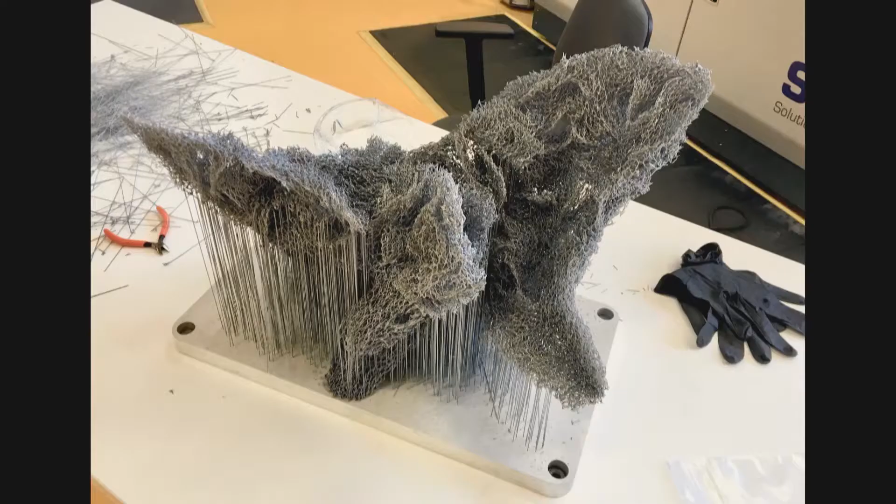This one's constructed very simply. This is laser-sintered aluminium. We've done a series of projects along these lines which are sintering aluminium or titanium. And it's a very small scale object. There's about 1.1 million elements in it. Each one's about 0.4 of a millimeter in diameter, so quite small.

And there's a whole series of different readings at different scales of this. So at the edges, it's sort of almost a frayed, feathered edge. As you move into the center of it, it becomes much more turbulent and thick and massive, I suppose.

We're quite interested at what scale. This is all made from straight lines, of course. It's quite small straight lines. We're quite interested in at what scale you read something as straight, and at what scale you read curvature in the work, and at what scale the intricacy almost dissolves into a silhouette of the project.

So this is, as I said, probably the most purely algorithmic of the processes that I'll show today. And the algorithm draws from the work of Craig Reynolds. This is work that was done in the 1980s around simulating flocks, schools of fish, social insects. And it was a very clear demonstration of the bottom-up nature of these types of behaviors that are found in nature. Now, what we're trying to do in the practice is not try and make architecture somehow swarm-like or flock-like or natural or biological in any way.

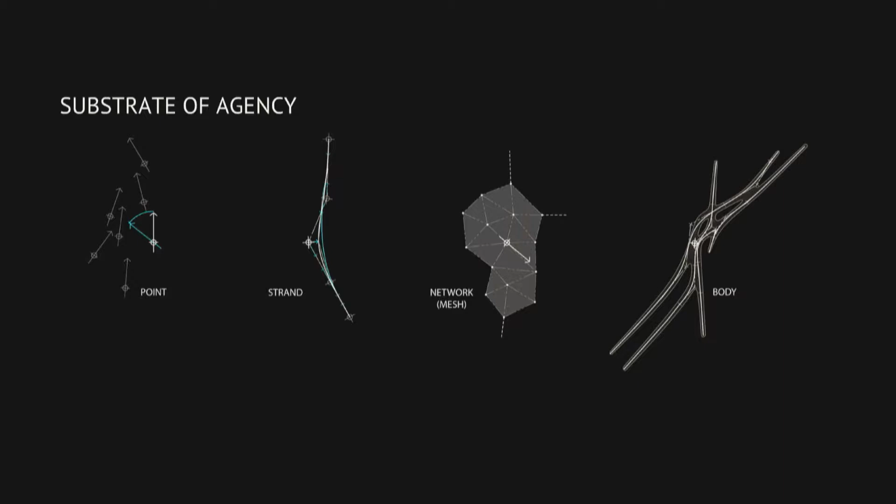A lot of the multi-agent work that we see arising in architecture and other related creative fields think of the agent as a point, and points are, of course, extremely difficult to make architecture from. So we're interested in the way agency can be embedded in higher levels of geometry. So occasionally we're using it as a point, but more often we're using it as a control point on a curve or as a vertex of a network, or the one on the right is an agent body, and I'll talk about that a lot. That's had a very large influence in the work that we do.

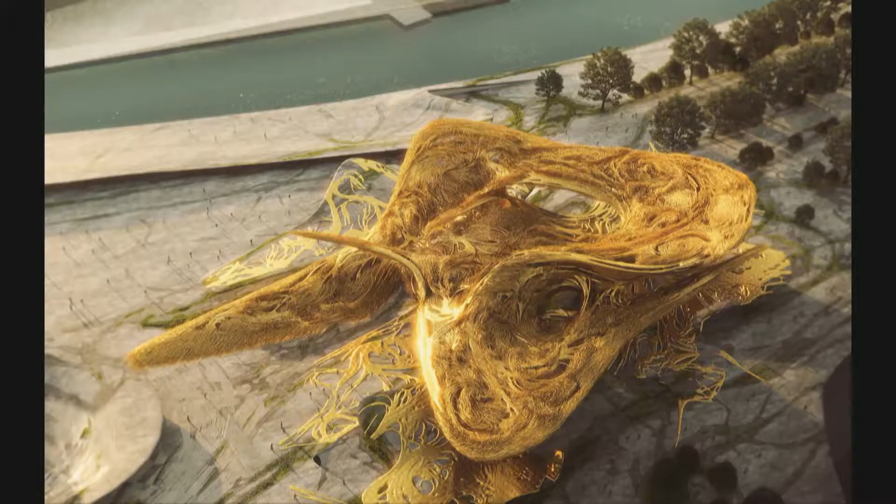So I want to quickly describe how we've used this over the years. So this first series of projects are all, I think, probably over 9 or 10 years old. The older projects in our work, and we've used this as a way of generating form and looking at the relationship between form and articulation and how these can be seen as a synthetic relationship, or the way that structure, form, and articulation might all be produced by the same algorithm and start to have a synthesis. Or the way these algorithms might be used to create these types of fibrous or hairy geometries.

Or the way this type of algorithm might enable us to uncouple the relationship between geometry and element. And I guess Gilles talked about this a little bit as well, this idea that you don't have an architectural element that relates to an architectural role. Say in this tower, for example, the shell of the tower is partly structural. It's partly, of course, formal and provides a surface. It's sun shading. It opens up at certain points. It becomes spatial. If it got a little bit finer, maybe you'd be able to describe it as being ornamental, but perhaps it's expressive in some way. So it's one piece of geometry that does several things.

So in this case, the architectural role of, say, resisting load is a behavior. And these behaviors operate and negotiate through this one piece of geometry. And then in the end, that piece of geometry ends up negotiating but also expressing the outcome of those different architectural roles and behaviors. So we've looked at this at several different scales.

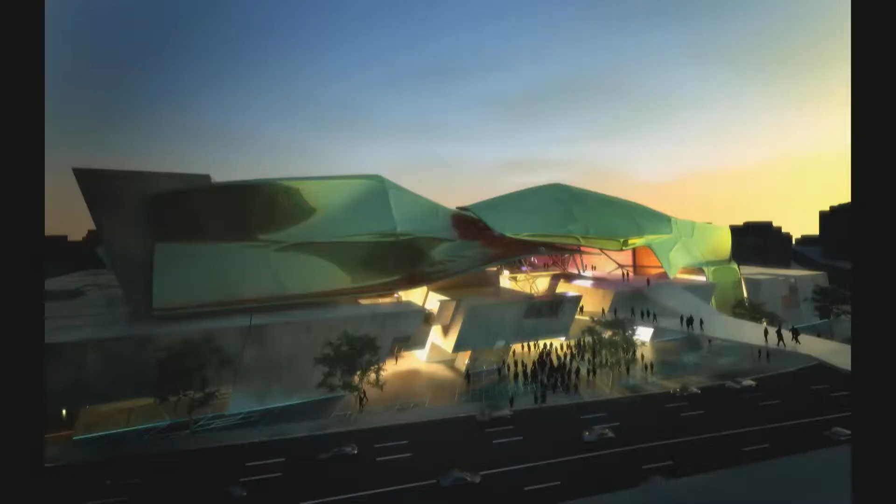Another key concern in the work has been around the relationship between the bottom-up and the top-down. When Rob and I started Kokkugia in 2004, we had this very naive belief that perhaps all of architecture could be generated from the bottom up through emergent systems. And of course, as soon as we started to attempt to do that on more complex architectural programs or projects, we realized that there's a whole lot of questions in architecture which are simply not complex ones. They're not ones that need self-organization, and they're actually much more suited to direct operations.

So we started looking at what is the relationship between the top-down and bottom-up, and in this type of example, it was modeled originally as a single surface, directly modeled in a top-down way. Then it began to self-organize and reorder in a bottom-up fashion. It's something that we worked on with Tom Wiscombe, an architect from Los Angeles.

We collaborated on this project, and this became a much messier relationship, almost symbolic of the way at the time our practice, Kokkugia, and Tom were working in quite different ways. He was working in quite a direct way, and we were working in quite a bottom-up way, and this became this messy hybrid of the two, almost originally a Frankenstein, where these two different processes would interact, and over time, something would be generated and then be remodeled and then go back and be regenerated. And through this constant process, it came into some sort of synthetic relationship where it was hard to trace the project back to either explicit moves or generative moves.

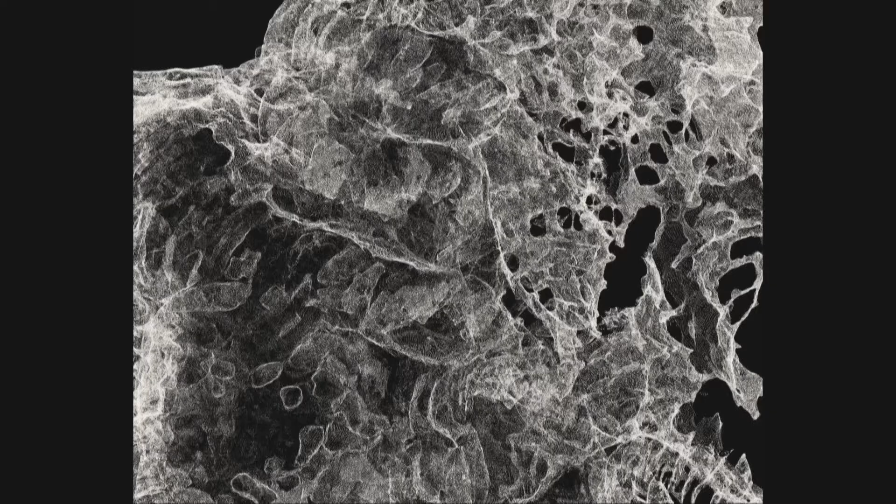So something is gestural, it goes back and is then reformed algorithmically, begins to self-organize, it's brought back out, it's repainted and rebrushed, and we developed a series of these types of geometries. And the aim with these geometries is to try and make something which couldn't be understood as being indexed back to its process of formation.

This is something that we've also worked on with students. This is probably the only slide I'll show today of student work. It comes from a studio that I teach at RMIT, and this is the work of one student from several weeks. We'd normally ask these students to produce 15 or 20 of these objects every week. What we're trying to do is ask students to really develop an aesthetic sensibility in terms of the way self-organization and painterly operations might work.

So another relationship, another way of undermining or subverting the algorithm is to take digital agency and material agency and put them into a feedback loop where they each inform the other. And so this is a project that was done in collaboration with Gwil and Cam, who I think are somewhere in the audience, from Fologram.

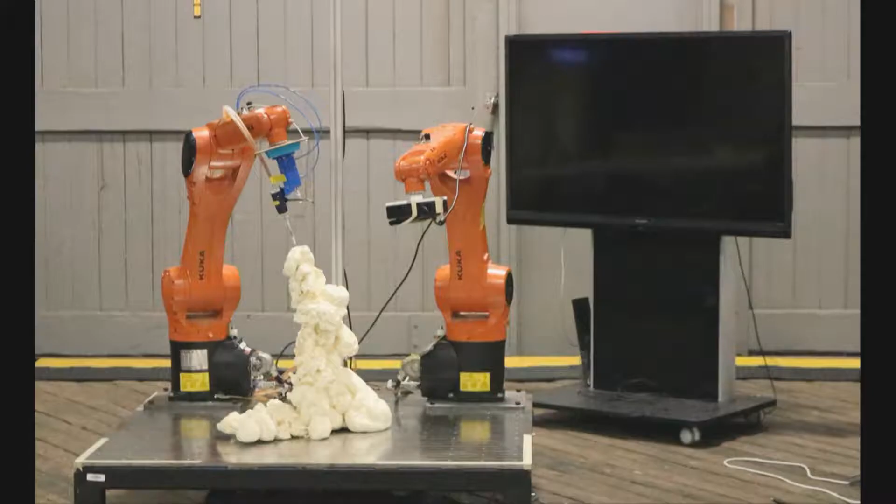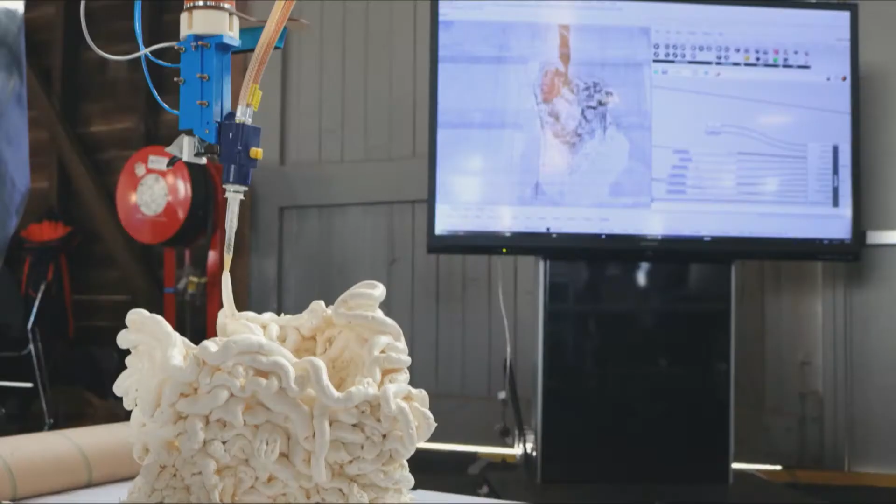So it's a totally absurd project. It's a project where we have one robot that's squirting out foam, another robot which is scanning it. In fact, there's a couple of scanners that are used. And so what the robot sees is something like this. It's fairly low resolution. And typically when we're working through this, there wasn't a pre-designed model, but what would happen is the robot would extrude some sort of fairly disgusting foam, and then it would scan that, and it would make a decision as to how it's going to extrude something next.

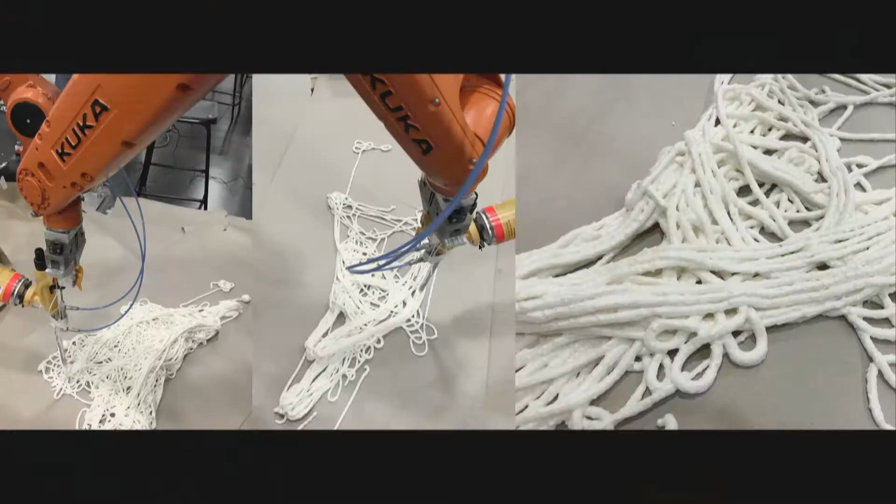But you can see even in the very early studies, there's some sort of order emerging from that. You can see that it's not an entirely random thing. But what was interesting about it was that it created things that we didn't understand as either digital nor simply this sort of spewing of foam, but it had a series of hybrid qualities and characteristics. I mean, these are not things that we would design, I suppose. But also, it had quite a range of characteristics. In these sort of 3 or 4 slides, you can see, I would say, a diversity of character. Okay.

The rest of the projects I'm going to discuss are based on an algorithm that we developed about, I guess, 10 years ago now. And this algorithm is an agent body algorithm. And basically what that means is the agent has a designed set of limbs or designed geometry. And each joint in that geometry, in this case there are small splines, each joint of that geometry has a level of agency in itself. So they can start to respond at a more micro scale. When we first developed it, it was for this. This was an attempt to make an ornamental ceiling for a design competition we were working on.

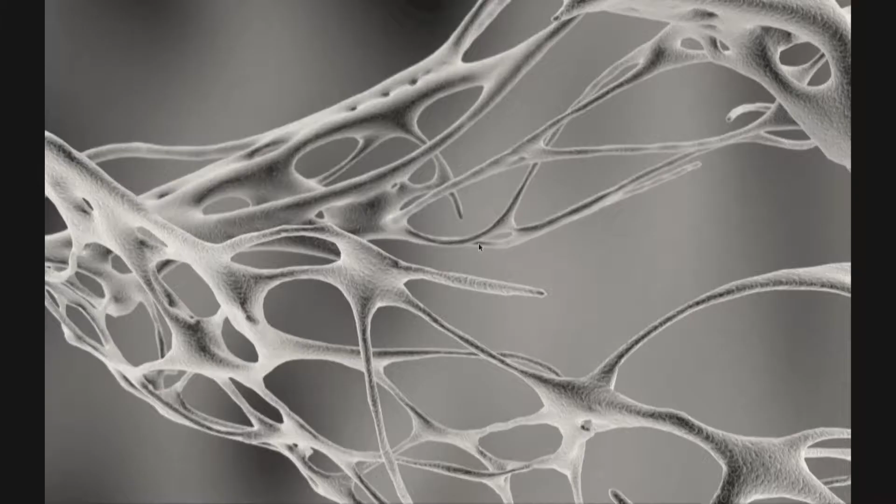And I guess in the project, there is a figure that starts to emerge from this field. But as you start to zoom in, then you see a whole lot of other conditions. So you can see some singular conditions on the left, sort of wing-like condition. Then there's sort of periodic repeating in it. There are parts which are near symmetries. And none of these conditions are written as rules or behaviors within the system. These are all emergent outcomes of the interaction of these agent bodies. And then as we begin to zoom in further, a whole series of other characteristics and qualities are evident in the work.

So when we did this in 2009, this struck us as being something which was strange, this particular image. And we tried to come to terms with what that really meant. And I suppose we saw strangeness as something which was not something we could immediately understand as being ugly or beautiful, but there was a hesitation in the way we'd evaluate it. And this became almost something we'd strive for. We'd strive to create things where we had to hesitate before being able to evaluate. Now, strangeness, of course, becomes domesticated, and this is something that now I feel is sort of very known, but didn't feel that way at the time.

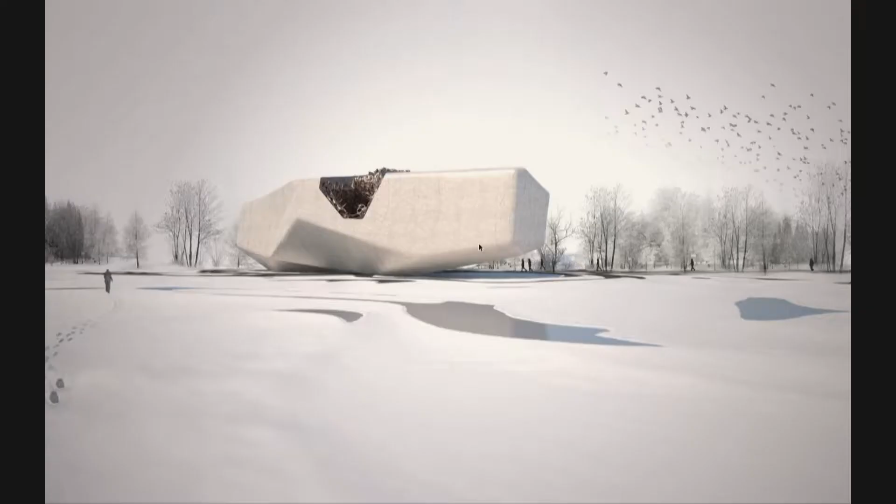The first time we tried to use this algorithm in an architectural project was a competition for a memorial and museum in Kiev at Babi Yar. And so this consists of a landscape, a sort of stone-like museum, and a carved-out memorial space. And the landscape was seen as a charged field. I mean, it's an incredibly charged project in many ways.

And we looked at the way agents might begin to navigate that field and create various different intensities and densities to generate a landscape. But then also, perhaps that becomes dense enough to then carve out a memorial space. So the project is quite unlike a lot of the projects I'll show today, and I have shown, which are all about synthesis. This project is deliberately about contrast or juxtapositions between certain things.

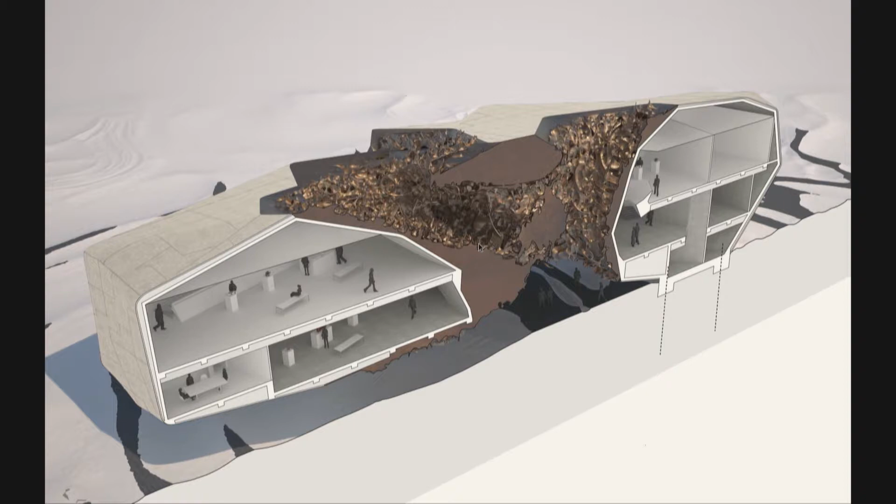It's a rock-like building that's sort of cantilevering as though it might be trying to fly, or it has a smooth outside skin and then a highly detailed, expressive, perhaps ornamental interior. That's the algorithmic diagram for the project. And this is really evident in the section. You see this contrast between the intensity of the memorial space and then the calmness or reflective nature of the exhibition spaces in the project.

Okay, so all of those agent body projects were really using the agent applied to something else. So it was either applied to the ceiling, or it was applied to the inside of a space that was carved out. But what we were really trying to do is work out a way in which we could have an algorithm that would both generate space and form, but also generate its articulation, its structure, perhaps its ornament. And so this is when we started working on this algorithm that I describe as a manifold swarm, where it goes from a cloud of points to a sort of almost manifold surface.

And this became a really critical image. This was produced in, I think, 2011, and became a really critical image in the trajectory of the work. I guess when we made this, it seemed to embody a lot of those things. It embodied something where the same algorithm created space, form, structure, its articulation, but it was impossible to build.

And so in many ways, the rest of this presentation is really trying to describe how we went about trying to build. It's what's become a personal obsession over the last 8 years now, to try and build a geometry like this. Not so much just to reify the digital, but really as a way of trying to understand how each time you solve one problem through new modes of fabrication, that has the potential to go back and fundamentally change the way you're designing something. And so perhaps that's what this presentation is. It's the story of that.

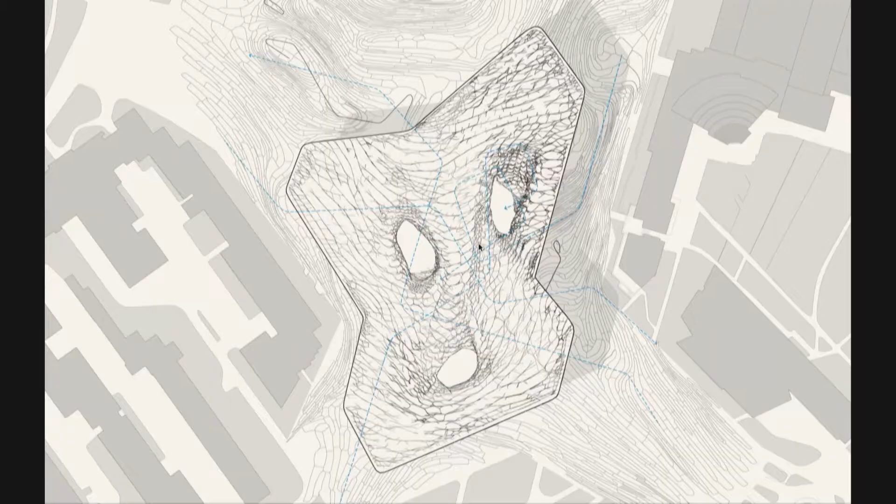So when we were first doing these types of work, this is for the Aalto University. It's a competition in Helsinki in 2012, perhaps. We were looking at the translucency of these, and we thought perhaps the first way of making these is through fiber composites. And so we went through a whole series of experiments. A lot of these were done through workshops at universities, looking at the way we could think about the strand as being one of these agent-based strands, but literally building it from fibers.

And some of those were made in 2D and then wrapped into 3D. Some of them were made on molds. And I guess going back to Mario's question or comments about molds, I think a lot of the story is about that: how we avoid them and then when they're actually necessary. We're interested in the way that these might be expressive. In the last 10 or 15 years, there's been a renewed interest in architecture in fiber composites. And of course, the first fiber composite building that I know of was the 1957 Monsanto House of the Future. So it's actually really old technology.

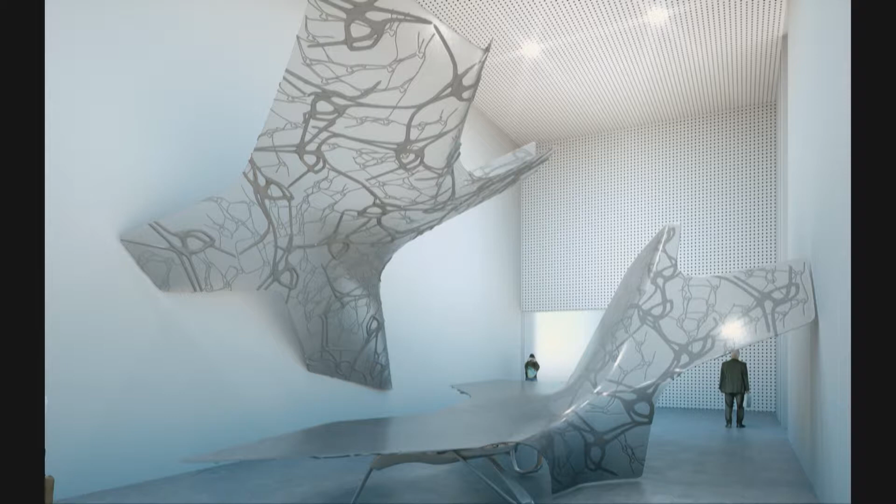So these are the digital models of that before we started to rationalize it. And then as we started to rationalize—these are some of the prototypes we made. This is the vacuum infusion process.

We realized we couldn't make a mold that's 70 square meters because of the cost. Yet we're trying to make an architecture that has no obvious repetition in it. So in order to do this, we made it out of 8 pieces.

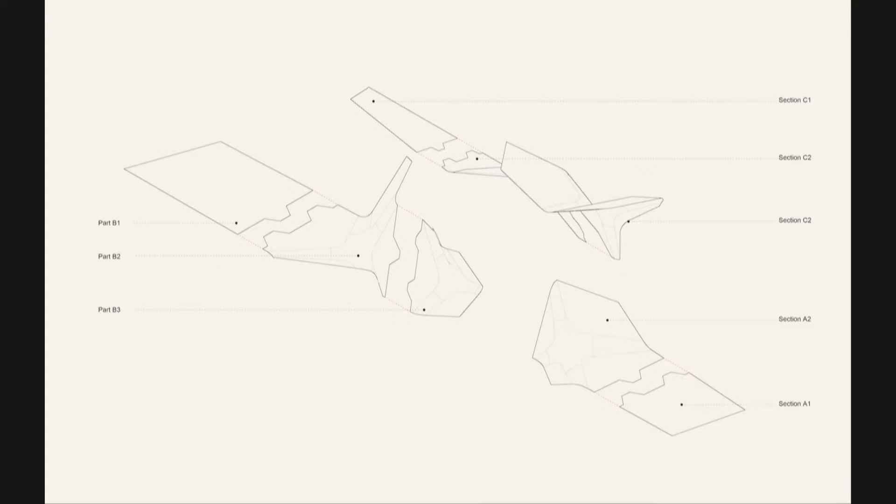3 of them are flat, very easy to make. 5 of them are curved, and each of these curved pieces comes off the one mold.

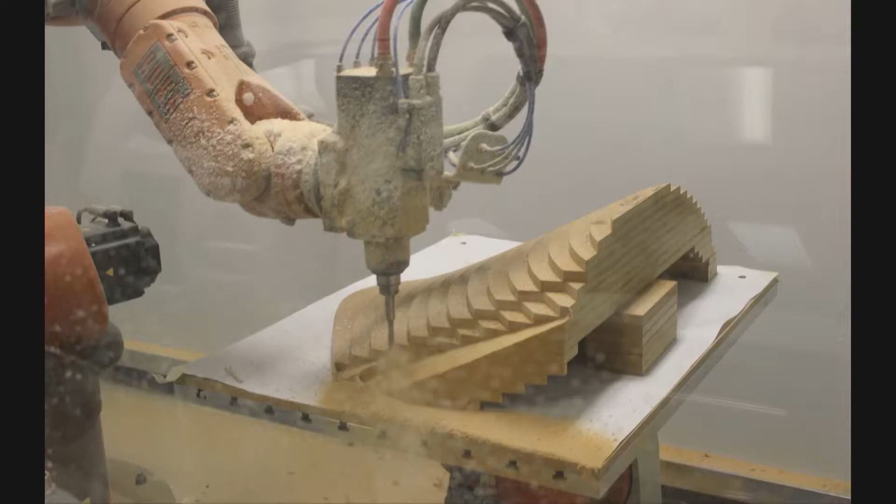Mold making is complex and difficult—there's a lot of milling involved. This piece is about 1.5 meters across. It's a very small part of a mold, partly made manually, partly made robotically. It's almost a small architectural project in itself.

It's about 5 by 6 meters, almost 3 meters tall, and there are 2 levels of structure embedded into this. One is a large scale made from rigid foam. Another is a small scale extruded from silicone.

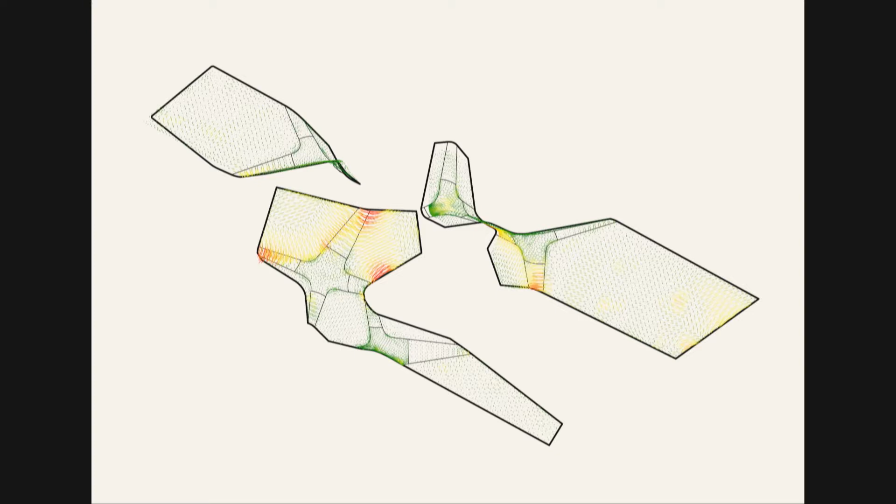And these agent bodies are responding to structural imperatives. I guess one thing I want to point out is that none of the work I'm doing is driven by structure—I see structure simply as an issue of building science, not important enough to drive architecture, which I think is fundamentally part of the humanities.

But it's something that always conditions what we do. This is a diagram of the bending moments within those surfaces and the way the agent bodies start to realign in response to the direction of those bending moments.

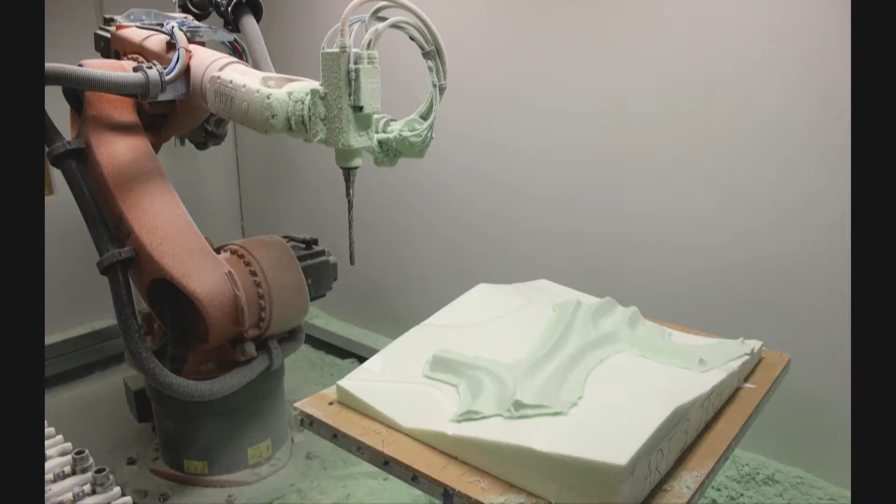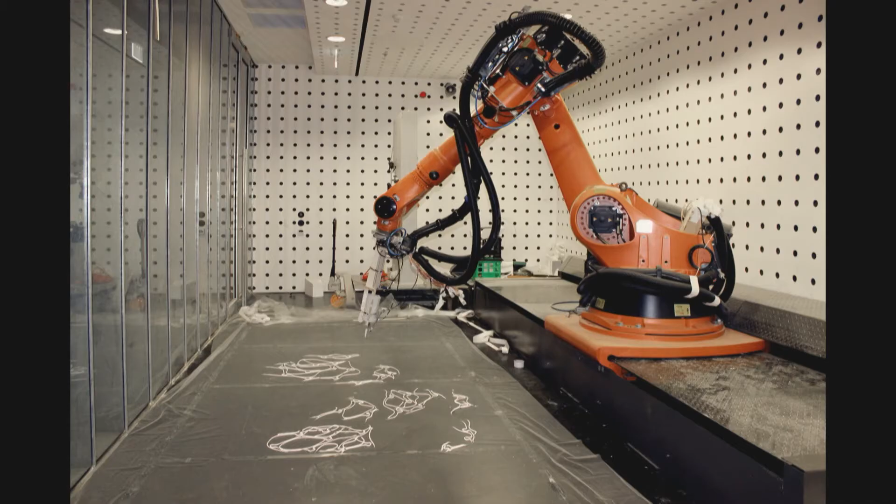The rigid foam was difficult to mill. It had to be milled on the backside, then the jig had to be milled, then the topside had to be milled. Very laborious for the poor robots. This was much easier — just extruding silicone out of a crude caulking gun that we fabricated and stuck on the end of the robot.

This is Cam in some poor working conditions, trying to work out how to lay out these one-to-one prints and drop the foam in, and even worse conditions for the boat builders. These guys used to make carbon fiber hulls for America's Cup yachts, and they said this was the hardest thing they had made, which shows how wrong we were to attempt making something this way.

Anyway, it's coated in fiberglass, trimmed down, loaded onto the back of a truck, and installed in this case at the Design Hub in Melbourne. They have a smooth side because the mold is reused, and an articulated side which comes off the top face. This was then reshown in Shanghai at the Biennale.

I guess I was trying to labor the point there that it was difficult and not really a sustainable way of developing this type of work. So we took a step backwards and said, okay, how could we create these types of forms and geometries through a simpler method?

This was an attempt to make it through flat sheet material, where you could take small pieces of metal, laser cut them, and when riveted together, they would find their own double curvature. It's a way of unrolling a three-dimensional thing back into 2D and backwards again.

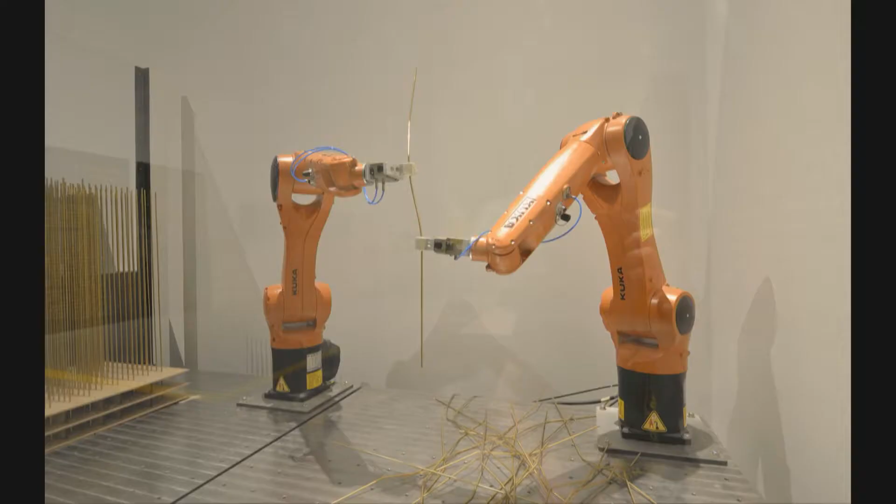So we started working on these types of projects, with the idea that we could build the fibrous lattice nature of these geometries through metal rods. This is a project where we have two little robots grabbing metal rods and bending them. Of course, there are CNC rod bending machines we could have used, but we don't own one of those — we do own little robots.

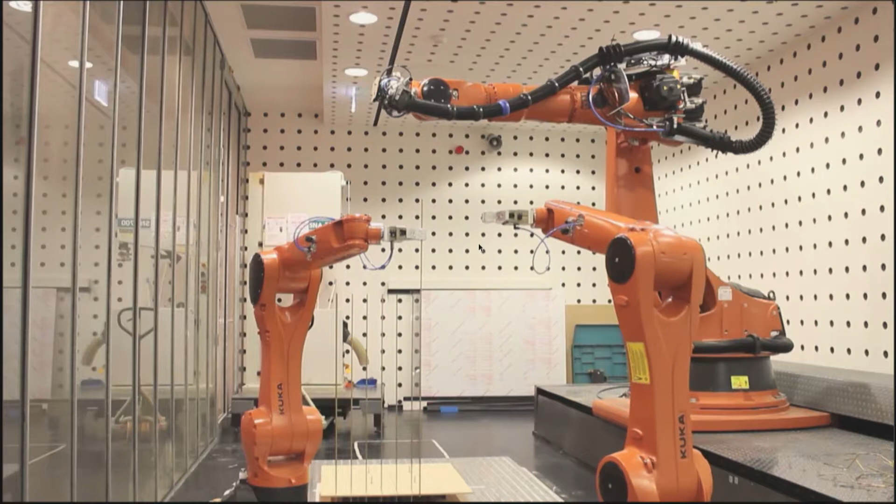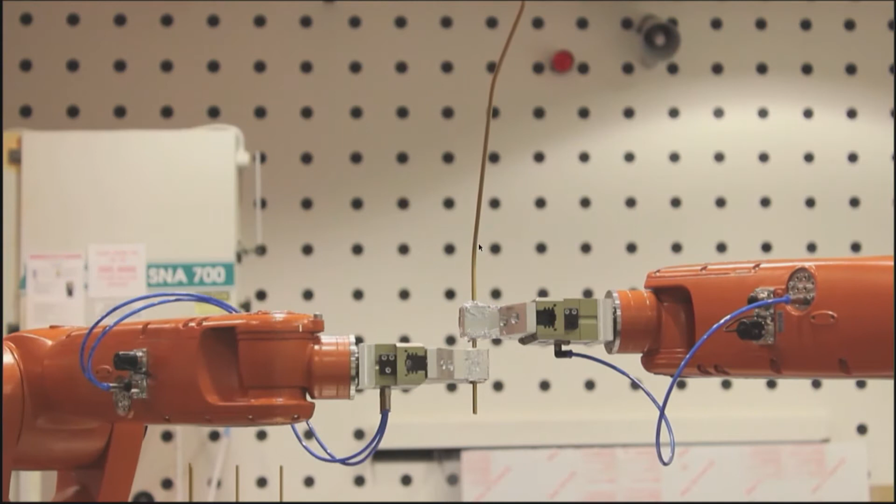So this is the type of intricate spatial implications of that. What we were trying to do is understand what the robots can and can't do — what they can bend, how far they can bend, how many bends in a certain direction they can do, what's the distance between bends. These are all parameters of robot behavior, and we needed to understand them to encode them back into the generative algorithm.

And the purpose of this is that the geometries we're creating are volatile, fairly wild, and very hard to go back and fix up or rationalize.

All the construction information, all the ways that these things are built, you must know before you start designing them, and then build them into the generative algorithm so that whatever is generated is inherently going to be built. Now, we optimized the wrong thing in this project: those robots spent one day and they bent 270 rods, every one unique. But then we had five people spending five days working out how to put them together and weld them. So we realized the problem here was not so much fabrication, but assembly.

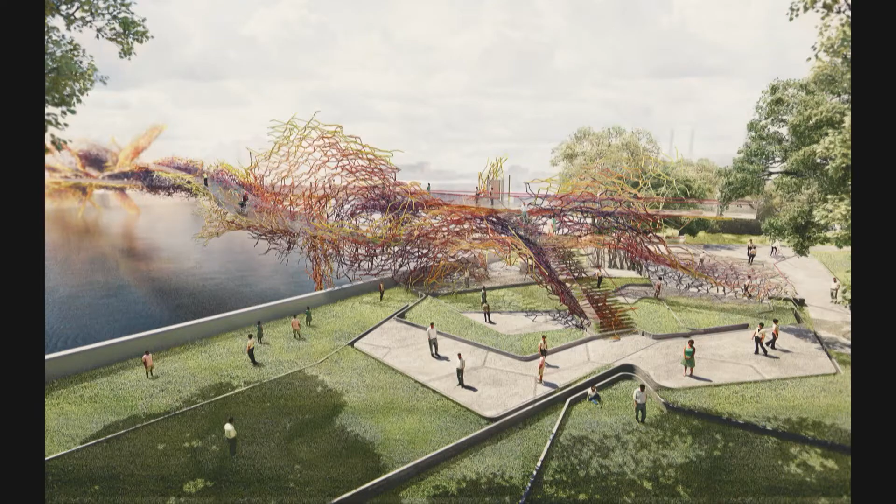We also went on to scale this up. We got bigger robots and bigger bits of metal and made a pavilion in Shanghai. But really our ambition is not to make these small objects - they're all sort of proto-architectural, things that want to become buildings, or in this case, we'd like this to become a bridge. By trying to prove at the small scale that this is an efficient, realistic, and feasible way of making something, perhaps it's not entirely ridiculous to make something that looks as whimsical as this does.

So I've described the projects going in a series of different directions, each developing their own limitation or problem. This became an important project a couple of years ago in trying to bring those problems back together. You can see in the work that we have an obsession with certain formal types, like things that are rock or boulder-like. We also had an obsession with these wings and this fibrous mass, these networks.

This was a project that tried to bring them together, but it had to radically change the way we thought about fabrication. This is an algorithm trying to unfurl like the other algorithms, but it's also constrained by these boulder-like forms. On the outside, they have a very hard silhouette. On the inside, they're starting to delaminate into a series of almost flaking geometries. So it shifts between surface and lattice, which is evident in the section.

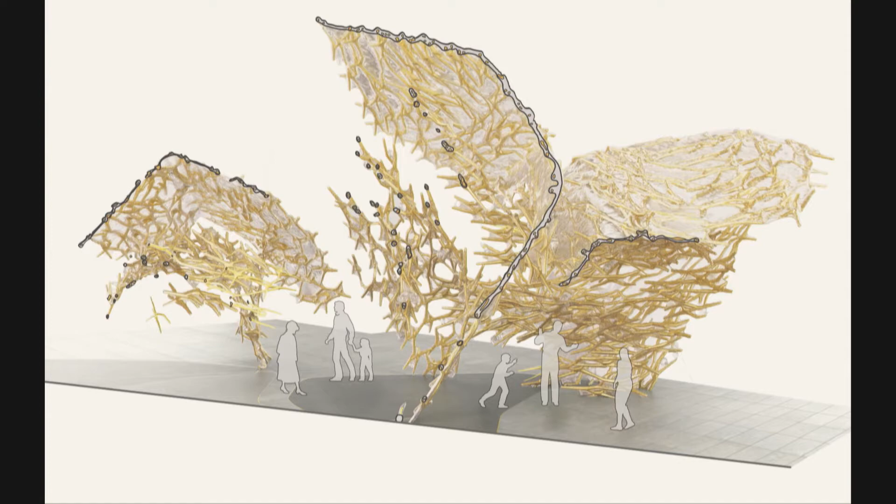In order to do this, we realized we needed a different methodology. In all the previous projects, we were thinking about how you build the network of agent bodies. We realized that in all our attempts to build them, we either needed molds for them, or we could make them as networks but couldn't surface them. Then this shift in thinking was that perhaps we should be fabricating the surface and then casting back the agent body structure into it.

That's when we started looking at large-scale 3D printing. This is a print where we're printing a thin skin, and then casting into it. You can vaguely see in these images a series of conduits, largely vertical conduits, which we were using to cast concrete into. This is a fiber-reinforced high-strength concrete - this is obviously a render - and then some of the prototypes we developed for that.

In many ways, this was able to bring together these concerns around different formal types, different structural types, and in a way that was highly efficient and dealt with the problem of the mold. So what happens is the skin is the mold. You don't produce a mold that you throw away, but instead have a sacrificial mold that you simply cast into. Then that project had a sort of younger sibling, this small project, for a public art project.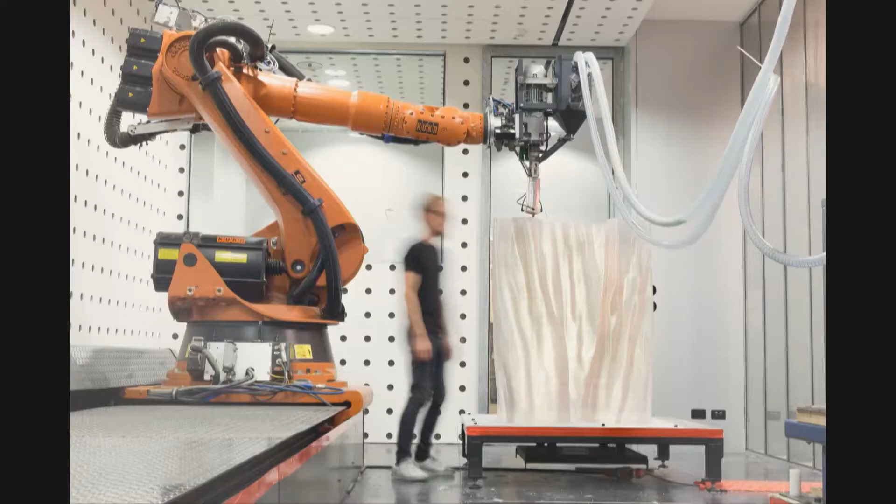So we decided to try and design through that method. This is an algorithm where basically we have a continuous sheet where it's a mesh, and each vertex on that mesh is an agent, and they start to interact. Through all these interactions, the surface begins to crease and fold and crumple in various different ways. And this again is some of the prototypes from that project.

And this is a screen grab from the algorithm, and you can begin to see how these agents are creasing or crumpling the surface. And it's most evident perhaps in the section, where you begin to see it's creasing and folding the most where there's most structural load, so on this arch at the center of that section, and then it's starting to corrugate towards the tips. So it's corrugating in the direction of the cantilever in order to resist the load.

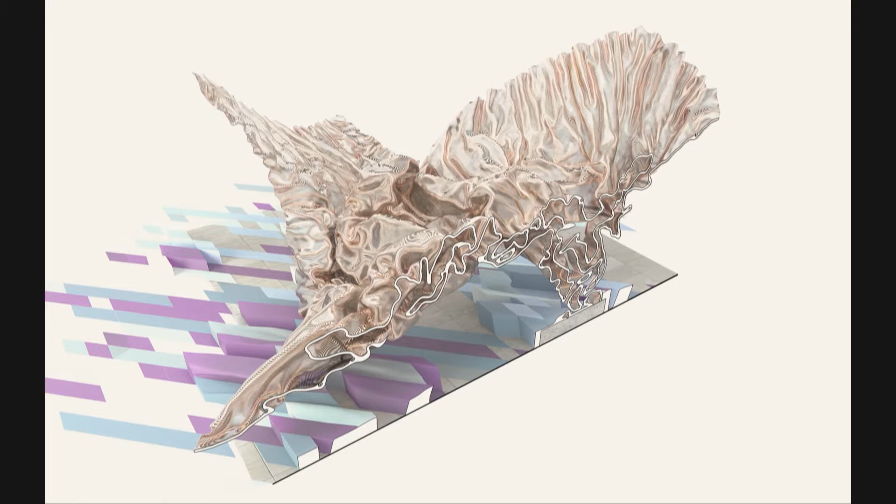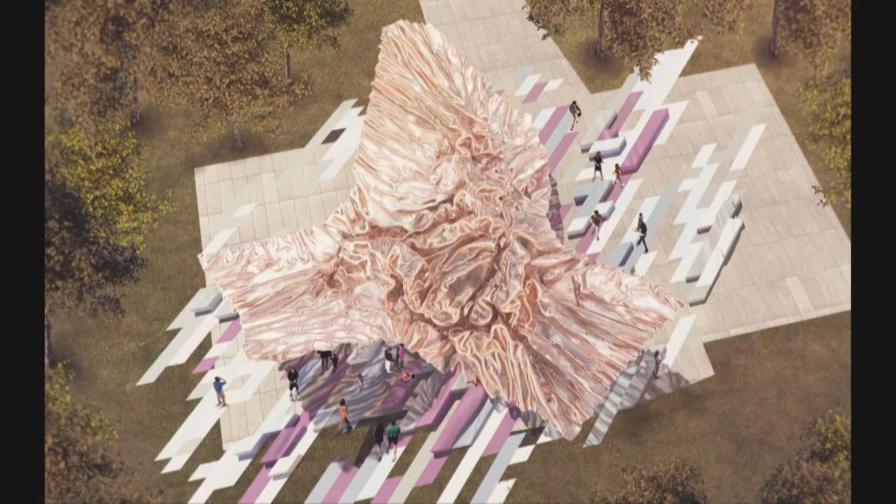So it's a sort of logic where we're combining, again, form and structure, but it's not really about structural optimization. It's simply about structure conditioning what we're doing. And so this ends up having sort of these three corrugated wingtips. This then led to the first of the built projects that we 3D printed. It's a very small project.

This is part of a facility called SensiLab. It's at Monash University in Melbourne. And so it's a research laboratory where my office designed the interior for, and I'll talk about that briefly. And then we took one very small part of this and 3D printed it.

And I guess the challenge, or what was interesting for us in this project, was just simply trying to get 3D printing through fire codes and building codes. And there's a lot of skepticism when we began about, can you get transparent polymers through all these codes? And I guess the answer is that yes, eventually we were able to do that.

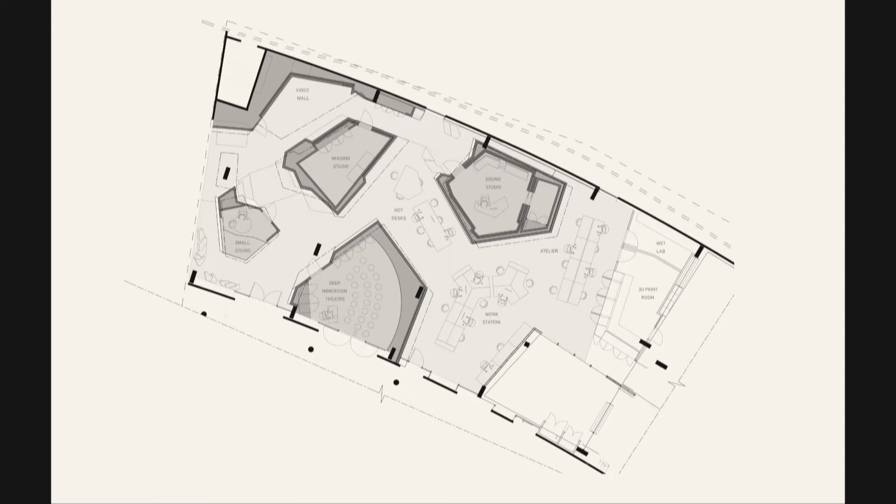So it's part of this building. It's an existing building built in the 90s by quite a good architect in Melbourne called DCM. It has this curved black wall with these sheared openings. And so we basically developed a series of these objects that would sit in this almost warehouse-like floor plate. We sort of gutted the original building, and then each of these objects sort of lean into the angle of the walls.

And so there's a series of different workstations and hot desking and different office spaces that goes between these objects. And then each of the objects have a very specific technical role. So one is a sound recording studio, there's a cinema. And the patterning comes from a similar strategy to the way we make the objects.

So the objects are their forms, and those forms get booleaned to make a series of openings and a series of, I guess, parts that are carved out from them. But then there are a series of virtual objects which boolean through and then create this patterning. So as you move through the space, these objects become in and out of focus. So some of them are smaller objects.

Some of the spaces become more carved, like this space, where they start to carve out, in this case, an exhibition space with a series of steps or display areas. And then this is just a giant capital, much bigger than the column, which has no purpose. But a detail of that is part of the reading is I'm trying to make these things look entirely solid, and so there's no joints at the corners, and this led to a very complex set of jointing details, which I won't go into.

So inside each of these objects, as I said, there's a different technical requirement in each one. This one's a sound recording studio. And this is a moment, I guess, where I've got to admit to a certain hypocrisy in the work, and I start off by saying that I'm entirely against the selection of known algorithms, because I think they're indexical and they're entirely unspeculative, and that's exactly what this is.

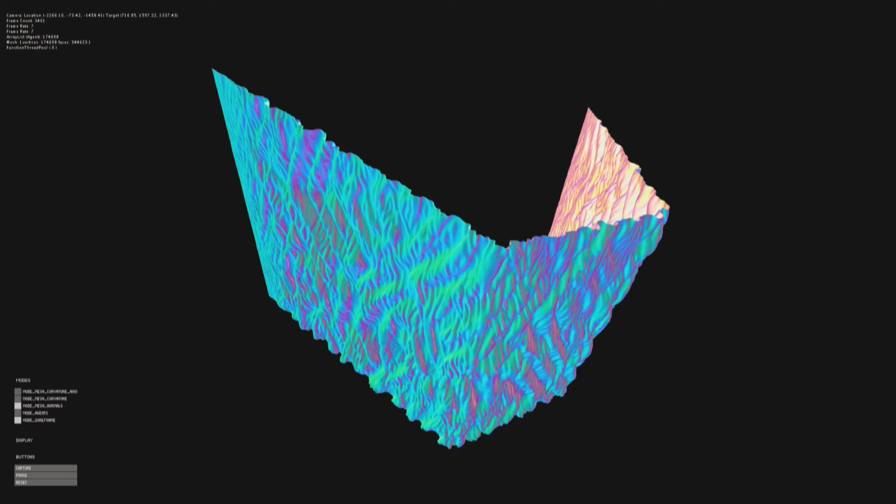I'll jump through this quickly, since it's undermining my argument. But this is, to me, the more interesting part of the project. And it's a very similar algorithm to the previous project. There's a couple of levels of agency here. There's sort of large corrugations and smaller corrugations on those corrugations.

One of the curators from the National Gallery of Victoria saw this project and immediately sort of understood it to be ice-like in some way, and commissioned us to do a project at the National Gallery, which was this project called Flow. And so this was commissioned as part of the Triennale, and it was designed to only be there for 10 days,

but it's in the sort of the Great Hall of the National Gallery, which, contrary to Gilles' suggestion that the best building in Melbourne is the NMBW garden building, I think this is the best room in Melbourne. I mean, not my project, the existing room.

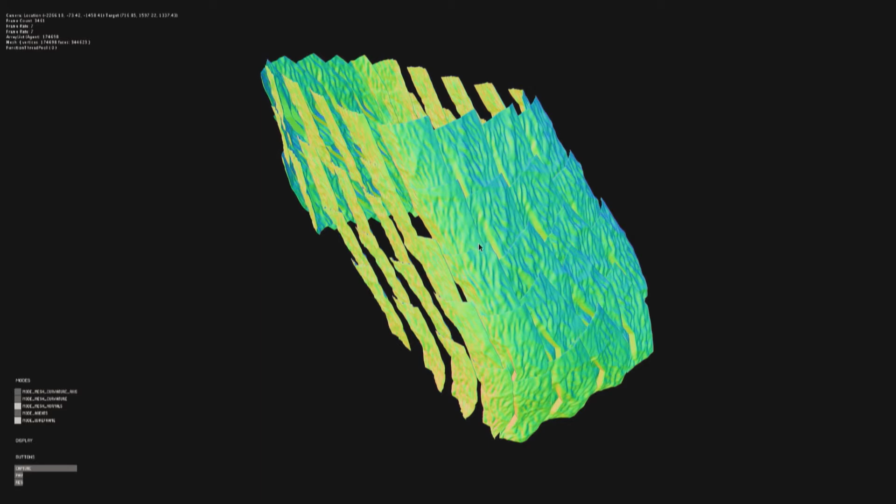It's a detail of the panels and the way they overlap with different translucencies or different levels of gloss on them. And so it's a swarm, I guess. It's a swarm of these panels. This is us doing some printing for it. So they printed fairly quickly. It took about 4 or 5 hours to print.

This one's also, I think Mario's gone to sleep maybe, but this is also for Mario. You made the comment that it's as easy to produce everything differently if you're using additive manufacturing. And it's sort of true. One of the things we realized is that if each part is quite different, then there's a lot of risk and a lot of effort has to go into the digital side. Even though it's just as easy for the robot, it's a lot harder for the person.

So this project was under incredibly intense time pressures. The whole thing had to be designed and built in 3 months, and it was only up for 10 days, so it couldn't be 10 days late. And so we made every panel very similar. There's very little differentiation in them. And it's to ensure that if we knew that one panel would work, then all of them would work. And so it's a type of sort of de-risking of the project.

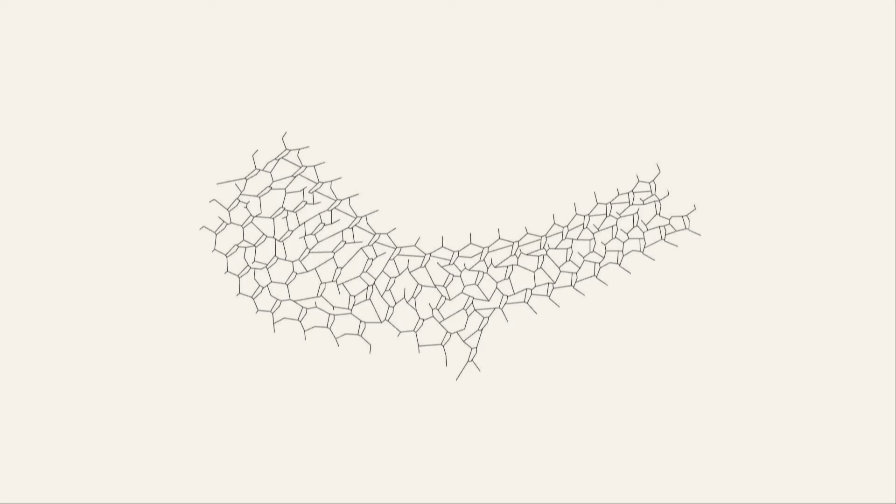And it had this intertwined steel structure between the panels, so you can sort of see in this image. And we're trying to make something which was neither a steel frame which was clad, so we're trying to intertwine structure and skin. So it's an unrolled version. I'm out of time, so I'm going to speed through this stuff. The structure was developed in conjunction with Bollinger Grohmann, who've done most of the work I've shown today, and CNC brake press folded. And that sits on top of this timber base.

And so, which is 5-axis CNC cut, a series of ribs, to make these sort of 9 relatively large objects, which had to be assembled in 3.5 days on site. So the timber, I can see why Gilles' interested in timber, it goes together very easily. The real problem was this bit when we had 300 individual different pieces of metal and 70 of these panels.

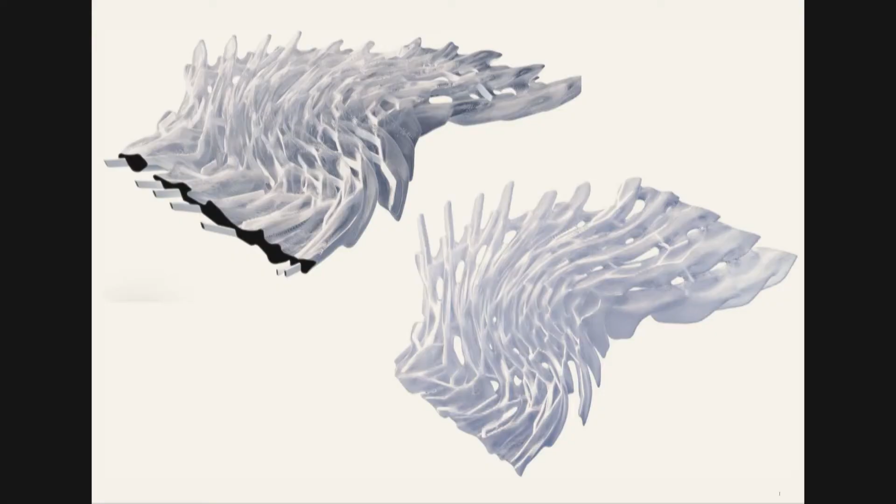This is a project that's currently on hold, but it's a project in the office that we're doing in Portugal. And each of our projects seem to scale up. So if the SensiLab project was 20 square meters, NGV was 80, this one's 360 meters, so it's getting larger. This is designed to have a steel structure backing into the plastic.

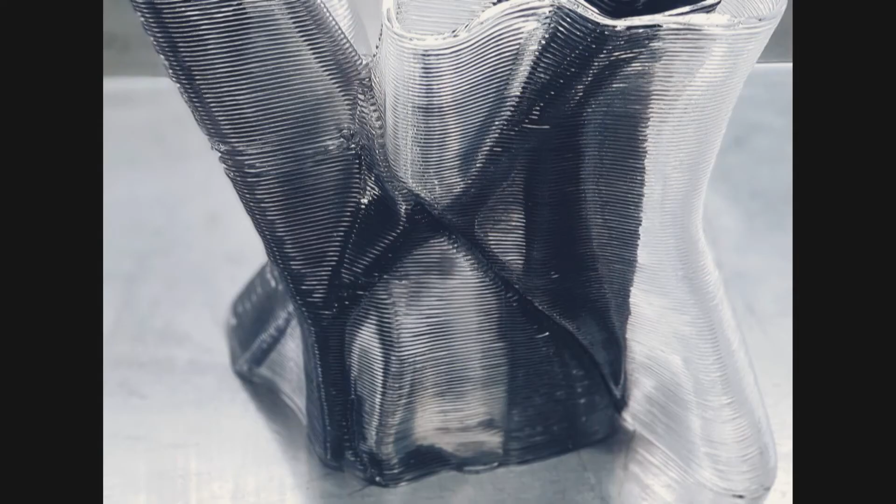And the last one I'll show very briefly is a current project that we're building for the Shenzhen Biennale, which will open in December. And this is where we're starting to embed carbon fiber. So we're sort of going back to the fiber composites. This is embedding carbon fiber into 3D printed elements. So this is a small prototype of one of the joints.

We've started to print this project. We're about 4 panels into what is about 30 panels. And this is one half of that project, so these 2 wings that will form a space. And I guess in many ways what this is trying to do is to tie together a whole series of concerns that we've developed throughout the projects, in terms of being able to remove the mold, to be able to embed structure into the project.

And I guess one of the things that I want to conclude by saying is that, Mario, one of your comments was that we can now simulate things like structure, and we can simulate to see whether something's going to work. We can test things very quickly. We can, I guess, virtually prototype thousands of times. And I think that's absolutely correct. I think that's really important.

But I think the other thing is that when you actually go through and build the thing, you realize the thing that you optimized was not the right thing to optimize. And it's actually by going through and building it that something else is revealed, which then changes the way you think about the design. What I've tried to describe is a little evolution of design projects, which is only really possible by the iterative failure, by doing them, by inventing problems for ourselves, and then these absurd ways we go about trying to resolve the problem actually lead to what I think is hopefully an interesting set of characteristics and qualities to the work. Thanks.